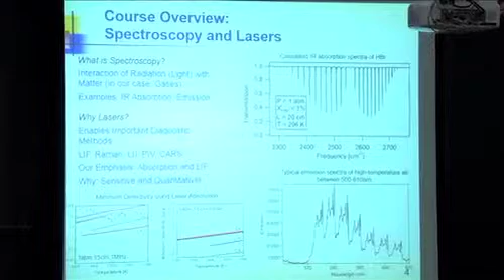If you look to the right here, there's a plot of the fractional transmission, one is at the top, versus frequency and wave numbers - that's 1 over wavelength. This is in the infrared at about 4 microns. It's hydrogen bromide, and what you'll see is there's a pattern of lines. We call these lines - a line is the wavelength or the frequency at which you see a specific molecular transition. So what you'll notice is that that molecule has a very regular pattern.

And every molecule is different - that's the power of spectroscopy. But there's some regularity here that is related to the structure of the molecule that we can take advantage of. So you can use spectroscopy to characterize a molecule and its bond lengths and its angles, or you can use that information to calculate the spectrum. So it goes both ways.

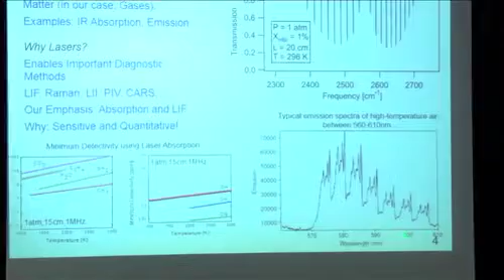Now the simplest form of spectroscopy for high temperature gases would be emission. You might look at this - this is from one of my laboratory experiments for my lab class. It's the emission that you see in electrically excited air in a specific wavelength range between about 500 and something up to about 600 nanometers. So if you looked in that region of this low pressure discharge in air, you would see this pattern.

So you'd say, well, that's pretty complicated. But if you look closely, the pattern is repeated - it's repeated, so there's something about the spectroscopy that's repeated here. And furthermore, there's some structure within here that we'd be able to see if we had high spectral resolution, which we don't have in most cases, but we do with lasers. I'm going to skip over this plot right here.

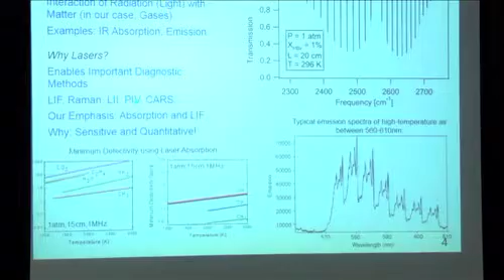So the reason we use lasers is that they give us intense power, collimated beams. Often they're monochromatic, so that we can do almost perfect spectroscopy experiments where we can take advantage of the shapes and character and positions of lines. So lasers allow us to do laser-induced fluorescence, Raman spectroscopy, laser-induced incandescence. We might use lasers also for doing particle imaging, velocimetry - a lot of different methods that are enabled by the high spectral intensities of lasers and their collimated nature.

So we like these techniques because they can be very sensitive and they can also be very quantitative, and I'm going to focus a lot on quantitative. I'm going to just give you some examples, and these are now drawn from energy sciences.

The next page will be propulsion. There's a lot of example applications you might be interested in: remote sensing of pollutants, combustion efficiency, process control, and other things. The parameters we usually care about are species concentrations, temperature, pressure, density, velocity, mass flux, thrust, and so on. We get at these by studying spectroscopy.

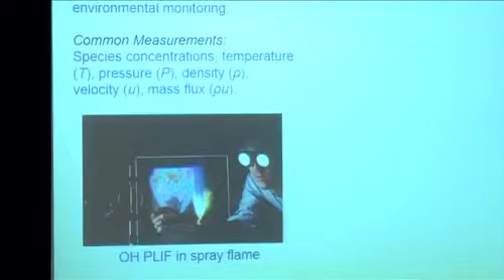I'm going to show you a few examples. This was the first OH PLIF image in a spray flame, from 1986. That student is now vice president of a company in Boston. PLIF stands for planar laser-induced fluorescence, which was something we developed at Stanford around 1982 or so.

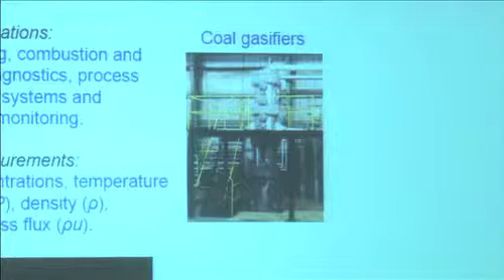That was a simple laboratory flame, but we can also study something big, like this coal gasifier, which is complicated by the fact that pressures are high, 15, 20, 30 atmospheres, high temperatures, particle laden, a very challenging environment.

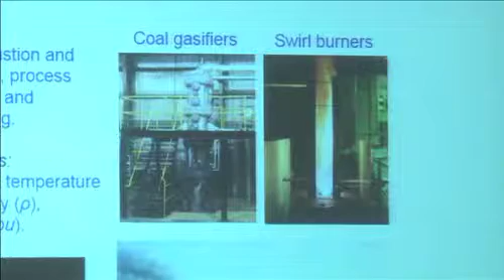Swirl burners, we did that on a visiting trip to University of Cincinnati with Professor Gutmark. This was a gas turbine combustor study. We've also been to coal-fired power plants. So these devices are useful in the laboratory at small scale, and they're useful in the field, and we occasionally have a capstone project for students to take their measurements to the field.

And here's some incinerators - John Farrell's not here, but these were from Exxon, a project we did for them on incinerators at a petroleum plant. So you get a sense of the scale of things. These are what I call energy sciences.

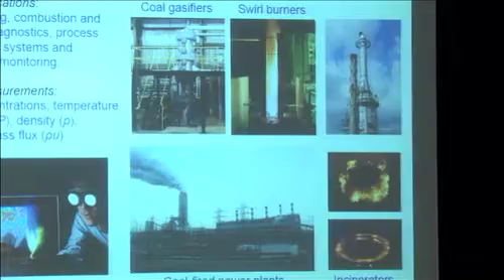Now let's look at propulsion ground test. I like to think that optical diagnostics have overlapping value from three different domains. Sometimes we study things where you're doing a very sophisticated ground test facility.

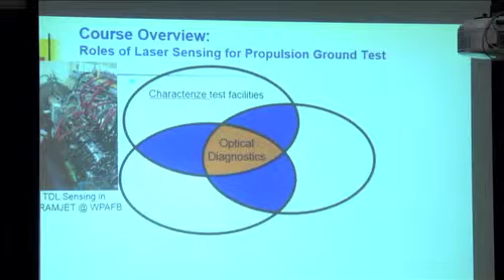This is a scramjet test facility at Wright-Patterson Air Force Base - very big, expensive to run. They roughly know how it works, but they need to characterize the facility, and we make use of laser diagnostics.

Sometimes you're studying something that is so difficult we don't even understand it yet, and lasers are used to try to understand a complex environment. This is a 5-tube pulse detonation engine that we studied out in the desert at China Lake some years back.

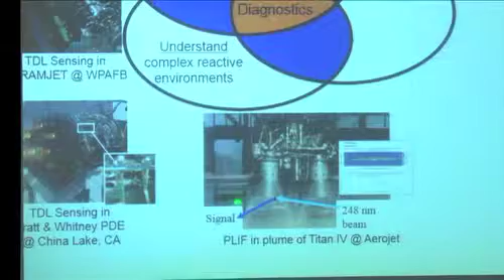One of my students did this in the exit plane of a Titan IV. These are flow fields which we don't even understand yet, so you're trying to use in situ imaging or measurements to characterize these difficult flow fields.

Other times, the facilities or flow fields are well understood, and what you're trying to do is generate high quality data that can be used to validate models, as with this simple scramjet - an injected flow of hydrogen in a high speed cross flow of air, and that's an image of temperature. Or we might be looking at an IC engine.

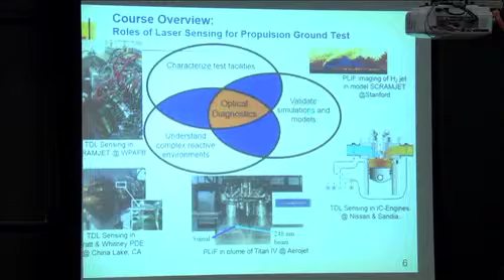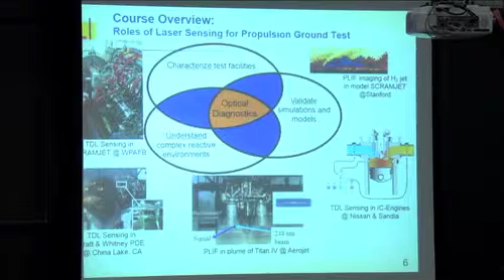So lasers are used both for high quality validation of CFD tools, to try to understand very difficult environments where in situ probes aren't useful, or to characterize facilities. For example, we've been to one hypersonic shock tunnel that only runs for a millisecond or so - can we characterize what happens in a short time in a high enthalpy facility?

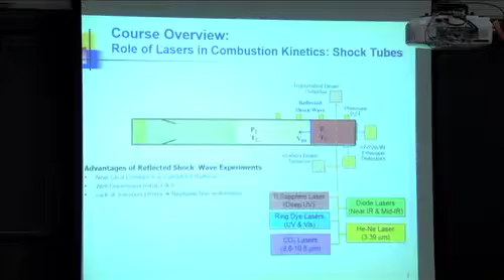So these ideas are applicable to large-scale systems and also to laboratory science. One of my favorite tools is the shock tube - a long tube, 100 diameters long. You break a diaphragm, send a shock wave down, it reflects and leaves behind a static sample of high temperature gas. You can pick any temperature you want.

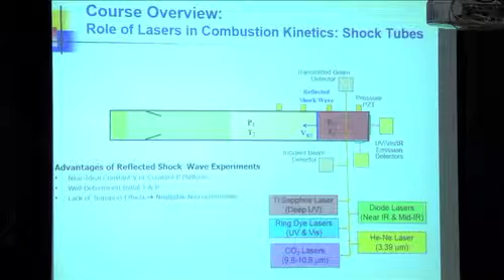We work down to 600 degrees, up to 11,000 degrees - a static sample which we probe with various wavelengths of light to measure what's happening inside as a function of time. We use this for chemistry because it's a nearly ideal environment: short duration experiments, sub-millisecond to tens of milliseconds, no heat transfer effects, no wall effects. It's a very clean single pulse experiment, with good clear optical access for quantitative measurements.

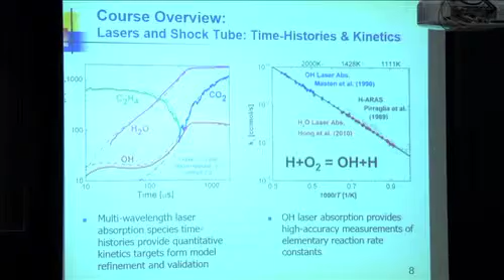Other times we're trying to characterize a very complicated chemical kinetic mechanism, and we might measure species versus time following shock heating. We might measure several species, which has the effect of constraining detailed mechanisms that might be comprised of 1,000 reactions. How do you adjust the knobs of something with 1,000 rate coefficients? Very hard to do. So you need higher quality data than have been available before, and we do this in the form of multi-species time histories.

Now, this would be what I call a potential energy well for a diatomic molecule. This is a distribution of potential energy that's associated with the charges. A diatomic molecule has positive and negative charges - they repel. So this molecule will vibrate with a variable internuclear spacing - that's this coordinate - and that's the potential energy associated with the charges.

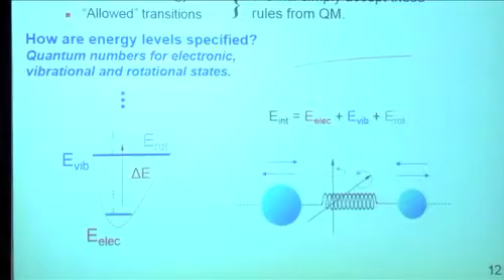In addition to that, the molecule has internal energy associated with vibration and rotation, and those levels are shown here. So this is our simple picture of a diatomic molecule - it's 2 masses separated by a massless spring. The variation in distance with time oscillates, and it's also rotating. We're going to find that if we just think of this as a classical spring-mass rotating system, with just 1 or 2 results from quantum mechanics, we get everything we need.

That's kind of amazing. All right, so quantum mechanics - the energy states are quantized, and we'll learn more about that later. What that means is that you have discrete spectra. So if we have a molecule in this state, and typically energy is written as a horizontal line, energy is upward, if we have a molecule or atom in this state, it may undergo absorption and go to another state, or it may undergo emission and go to another state. If you can have one, you can have the other. But those are so-called allowed transitions. It may be that this is not allowed to go directly to here - quantum mechanics would forbid that. So discrete energy states means discrete spectra.

Now, Planck's law, and when I can remember, I put a red box around things that are really important. This is just conservation of energy: Delta E is E upper minus E lower. Not so hard. But now that's equal to h nu - whenever it's a frequency, that's Planck's constant h. So this is the equation that you would have heard from physics, the duality of radiation in terms of photons and waves. This is saying that delta E is related to this frequency, but you can also think of it as the energy of the photon.

So this is the very famous Planck's law, delta E equals h nu. But you know that C is lambda nu, so I can substitute until delta E can be written as hc nu bar. When I can, I write nu bar for a special kind of frequency. It's 1 over wavelength. It's a measure of energy.

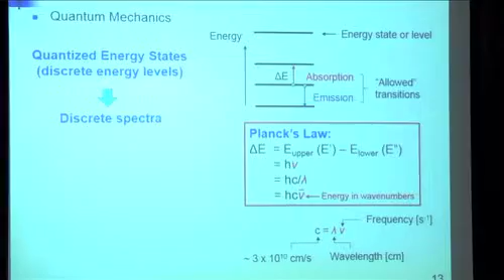So Planck's law we use to relate these energy levels to the wavelengths for which we're going to see absorption or emission. If you're dealing with small molecules, and oftentimes in combustion we're dealing with small molecules except for the fuels, small molecules have a discrete structure that tends to be isolated. We can see the different features.

If you have large molecules, for example a fuel molecule like heptane, then you begin to see that the absorption and emission spectra look like they're all blended together. We can't separate them, because there are so many energy levels they begin to overlap. So it's typically discrete or blended depending upon the size of the molecule.

You have to be very comfortable with this. Everybody should be comfortable with it: C equals lambda nu. So you can always go back and forth from lambda to nu.

The two main ideas that we like to use are emission and absorption. There are other types of spectroscopy, Rayleigh scattering, Raman scattering. We'll talk about those briefly.

In absorption, you send in a bright light with intensity I0, and the units might be watts, or watts per square centimeter, or watts per square centimeter per unit frequency, and out comes a little bit less. How much less depends upon the path length and the composition. If you scan this laser in frequency or wavelength, you would see isolated features if you're in a region where absorption takes place. Those are the individual lines, which is another word for transitions that we can see.

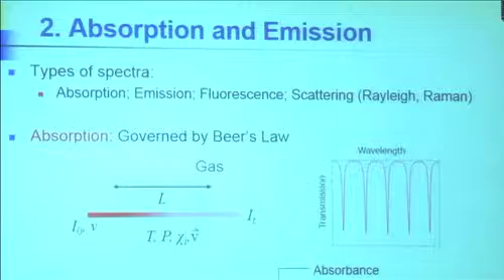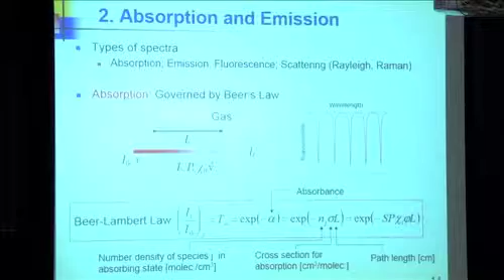That's going to be governed by what's called the Beer-Lambert law, which we're going to derive around lecture 5 or 6. It says that the ratio I to I0, called the transmission, is given by an exponential decay law, which may be written in different ways, but this term is called the absorbance. You can think of it in terms of a cross-section, a path length, and a number density. So that exponential decay contains the information we might want. If we know L, and if we know the cross-section, we can solve for N, and so on. That's a key relationship, that's why I put it in the red box.

I want to communicate the idea that spectroscopy has really three components: lines, bands, and systems. We have to be comfortable with those ideas.

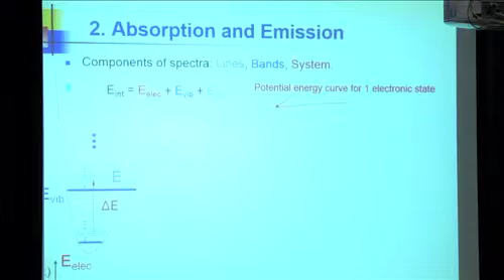Now we're back to this. When you see this diagram, it's typically for a diatomic molecule. This is the distance between the nuclei, and this is the energy stored. It's called E-electronic here, but it's the potential energy associated with the charges.

Superposed here are horizontal lines that correspond to vibrational levels, which are quantized, and some fine-scale rotational energies, which are also quantized. The simplest way to think about the energy of the molecule, not the kinetic energy but the internal energy, is that it's the sum of the electronic energy, vibrational energy, and rotational energy. We imagine that they're independent, and that gives us some advantage, so we think it's simply the sum of all three contributions.

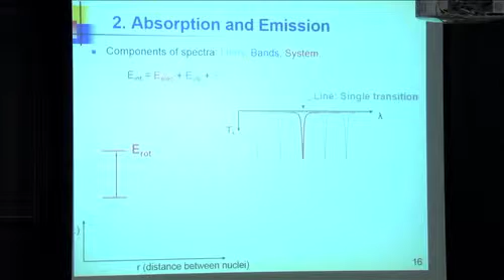If we look at an individual transition from one state to another, that's a line. The reason it's called a line, you'll see in some exposures on film - the way those experiments were conducted for 50, 100 years, the horizontal axis was wavelength and the vertical axis was nothing, just another way to gather more light. So it appeared on film as if they were lines, but they were really just single wavelengths for which light was being emitted or absorbed. That's a line, a single transition.

On the other hand, if you looked at the multiplicity of lines that might go along with a vibrational transition between V lower and V upper, and scan across some spectral region, you would see a family of lines - in fact, you might see this pattern I showed you earlier. Those groupings of lines, that group of lines, is called a band, and that band is comprised of two branches called R and P. So these individual elements are lines, this group of lines is called a branch, and the two branches together is called a band.

A band means the specific upper and lower vibrational states. So these would be the delta V, V upper minus V lower, of 1. These are the allowed so-called ro-vibrational transitions, ro for rotation, V for vibrational.

So ro-vibrational means combined rotational and vibrational quantum number changes, because they go together. This is for delta V of 1, which is the strongest case, but it's also possible for delta V of 2 or 3 to occur. They're usually quite a bit weaker.

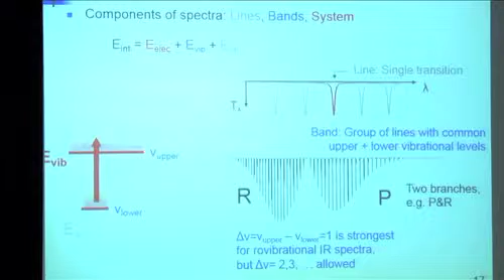So if I showed you an expanded region of spectral space, here's the delta V of 1 transitions, here's the delta V of 2s, and here's the delta V of 3s. Each time you go from here to here, the intensities go down by about a factor of 100. So these are the strongest ones.

This is for CO. So these are called the fundamental, first overtone, second overtone. Each one of these groupings is a band. So bands have lines. Bands have two branches.

Now we have to recognize that you can also have transitions that go between different electronic states. So in nitrogen, molecular nitrogen, there will be different electronic states, and they're called A, B, and C, for example. Not shown is the one called X.

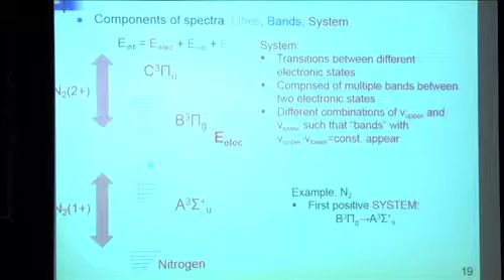If you have transitions between these different manifolds of states, all of the lines between these two manifolds is called the system. So the system is like the big picture of all the lines that go from B to A. A different system exists between B and C. The system would be comprised of many bands, and the bands would be comprised of 2 or 3 branches, and the branches are comprised of lines.

Spectroscopy is accounting, just accounting.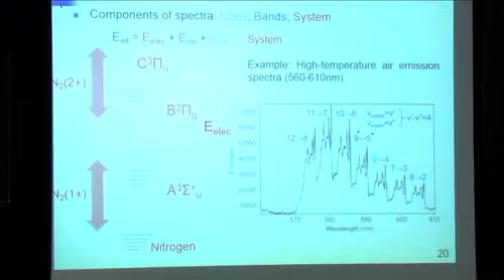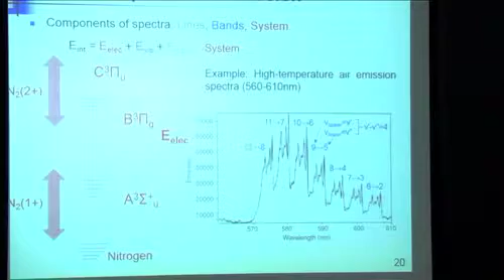So 6 to 2, 7 to 3, 8 to 4. You'll notice that all the numbers differ by 4. So this is the group of the delta V of 4 bands. It's also possible to have delta V of 3, 2, or 1, but these are the primary delta V of 4.

So now you're realizing that when you go to systems, there can be a lot of lines. If you have just a band, it's not so. We could blow this up and figure it all out if we had enough spectral resolution. There's a lot of rules being followed here, and a lot of notation. But in the end, it's really just lines in bands or in systems, and you have to decide what you want to study.

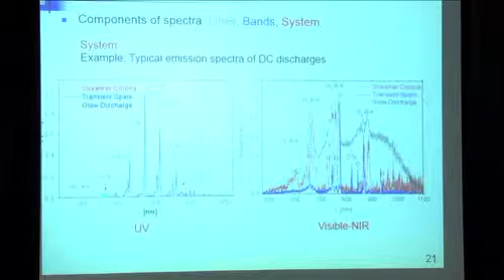If we looked at a few different electric discharges in air, maybe wet air, you begin to see a lot of different features in the region between 250 nanometers and, well, your eyes see between around 400 nanometers and say 750. That's where your visible is. To the left of that would be the UV, and to the right is the near infrared. This is another case of a different kind of plasma.

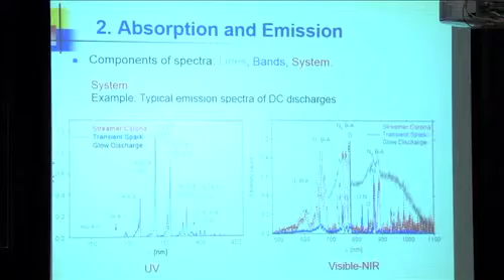The thing about a plasma is you can have a cheap, low pressure discharge and get a lot of light out. So you use emission when something is hot. You tend to use absorption when things are cold. The emission comes from excited states, so all you can learn is something about the excited states. In absorption, you learn something about the lower states. But there's patterns, and with time, you can figure out these patterns—which systems are involved, which vibrational bands, and so on.

So we look at a single line, and now we start adding them up, and there's a lot of lines here. You might think that they all overlap, but they don't. This is where the word line comes from, I think.

So in the old days, people would use film—maybe they still use film. People would use film and put it at the exit of a machine called a spectrometer. Actually, they called it a spectrograph. Spectrograph implies that you're going to measure at multiple wavelengths simultaneously and record on something like film, or maybe nowadays a CCD array.

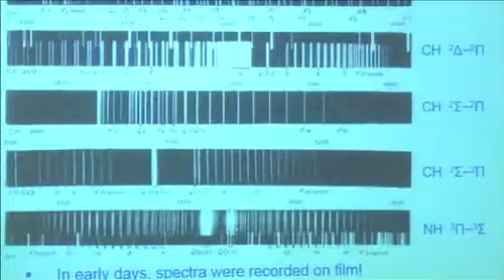So you take light, send it into the box. The box disperses the light so that light at any one wavelength goes to a specific location. So this, from left to right, is just a distribution of intensity versus wavelength. And at any one wavelength, there's a line that appears corresponding to a specific transition.

Over time, the spectroscopist would learn, well, this is the spectrum of OH for a particular system. That's the 2 sigma to 2 pi system. You'll learn about that later. For the 0-0 band, they can figure out what that is. Once it's known, it's known forever. OH doesn't change. CH, NH, and so on. Each of these molecules has its own spectrum.

You can change the spectrum if you change the temperature, because you populate different states, and therefore different states emit. So by changing the temperature of the emitters or the absorbers, you can probe different parts of the spectrum and learn more about the molecules.

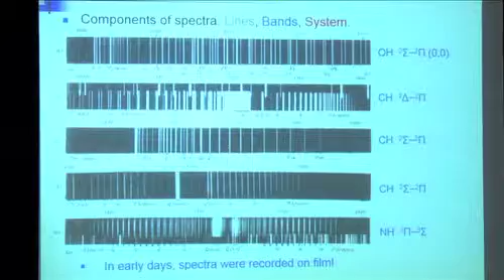So you can use this to study molecules. What's the bending angle of H2O? You can figure that out. What's the internuclear spacing? You can figure that out. So you can figure out a lot from spectroscopy, or use that information to calculate the spectroscopy.

So it used to be that people would use film. Now they'd probably use CCD arrays. Now we use lasers. And I'm going to talk about absorption and emission.

Absorption is a favorite of mine. We send in some light from a wavelength-tunable laser, through some sort of medium—might be a flame—onto a detector. The detector just sees photons. How many are coming in?

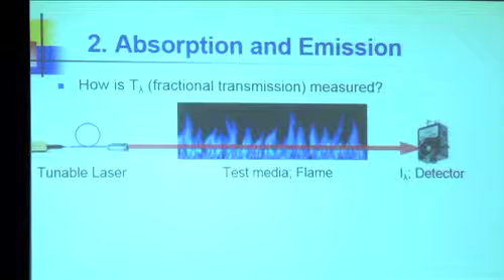Now, since I told you the energy states are quantized, the difference between two numbers is a number, and that line should have only a single wavelength. But then quantum mechanics tells us one more thing: there's something called the uncertainty principle, which says that when you have microscale systems, if you watch it for only a limited amount of time, there's a limitation on how well you can specify the energy. That's the Heisenberg uncertainty principle.

So it turns out that for these reasons, lines are not infinitely narrow. They're not a Dirac delta. They actually have some width. And that's very interesting because this width depends upon environmental factors.

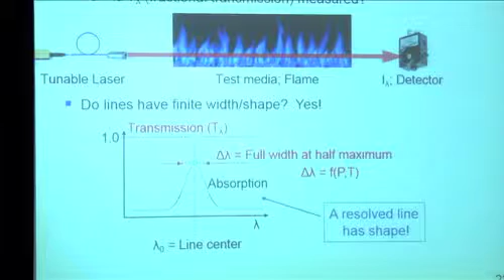So if you were to study the shape of an absorption line—here's the transmission, which I can invert by Beer's law to plot as absorbance—it has some width. Even if I measure this with a monochromatic laser, it'll have width, and that width is a function of pressure and temperature. So all of a sudden, with the laser, we have the ability to use line shapes to measure pressure and temperature. That wasn't possible before we had monochromatic sources.

Just to reiterate, there are three key elements of spectroscopy: positions of lines, strengths of lines, shapes of lines. Positions of lines can be determined once we have formulas for the allowed energy levels, and the rules from quantum mechanics that tell you which ones can talk to each other. You've just calculated the positions of all the lines that are possible.

But you don't know how strong they are. The strength of the lines is something else—that's a different part of science. So we have to find out where the lines are, how strong they are, and then how they're shaped. Those are the three key elements we need to understand to do quantitative spectroscopy.

Now we have to deal with something called the Boltzmann distribution. So now I ask: how many people here have not had statistical mechanics? Everybody's had statistical mechanics. Everybody knows S equals K log omega. Everybody's heard this. Okay, so this is really an important thing.

Statistical mechanics is so important to us because it tells us the fractional population in a given state. If we have a state N1 of a specific molecule or species, we can calculate the fractional population of that species in this state using this simple relationship: G times e to the minus energy over kT.

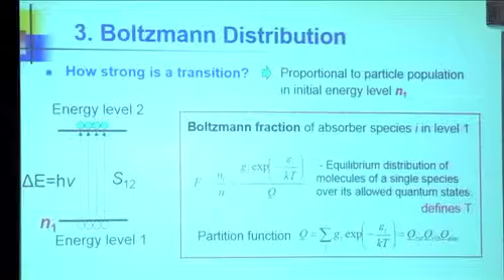You can have a rotational temperature that's different than a vibrational temperature. You can have situations that have no temperature. If you have a laser with a population inversion, what's the temperature? Negative. Pretty amazing. So you have to be careful what temperature means. It's your friend, but it can be tricky.

But if we have a well-defined temperature, this is how we get the population in that state. Why do we care? Because the simplest concept for absorption and emission is that the signal is going to be proportional to the number in that state. So we need to be able to count the number in that state in order to estimate the strength.

Okay, that's 29 minutes. That's enough theory for today. What I want to do now is give you a bunch of examples, and the idea is just to show you how powerful these ideas are and how far you can go.

All my students are mechanical engineers. They start coming in, they've never had a course in spectroscopy. I've never had a course in spectroscopy. So you learn, but you can learn this stuff.

I've had a vision for quite a long time of using tunable diode laser absorption in aero propulsion. Here's a scramjet cartoon. The idea is that you would have a family of different lasers, little semiconductor lasers, very very small, each one with a different color or wavelength. Each one maybe can be tuned over some narrow wavelength.

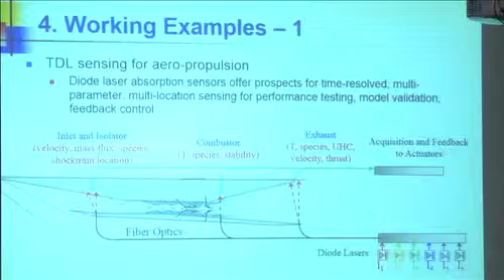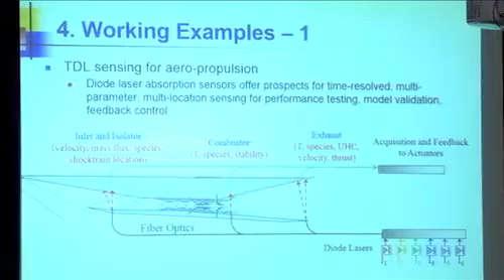You propagate those things through fiber optics and probe different places in your combustor. This is a scramjet combustor, but it could be some other kind of combustor, like an internal combustion engine. Each one of these colors is designed to tell you something different - maybe it's a different species, maybe it's to give you temperature or velocity.

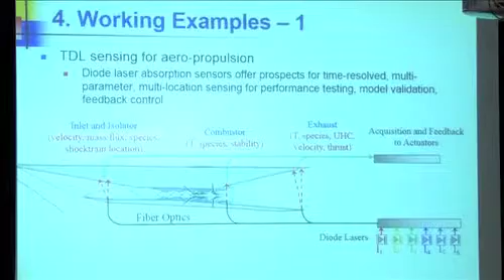Or you could do something up here at the inlet - you can measure the mass flux. We've done this in the inlet of aircraft, on the ground. And the Air Force is trying to do something like this now with some of their scramjet tests. So this is the idea.

You would take this same physics, but you have to know the spectroscopy well enough to pick these colors and design your experiment. But you can measure a lot of different quantities in this experiment. Over time, we've worked on techniques for temperature, velocity, water, CO2, O2, and others.

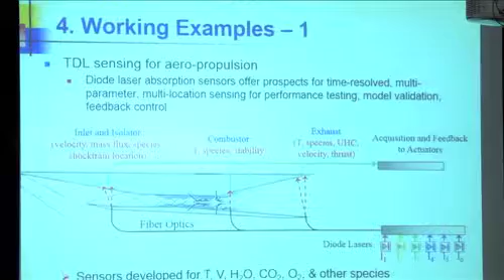Generally, we develop the ideas in some simple laboratory system, and then we might take them on the road. We've been to ATK on Long Island, University of Virginia, Wright-Patterson Air Force Base, China Lake, a lot of different places. And as I said, the Air Force is now starting to use these ideas in some flight tests.

And I think eventually these ideas could be used for control. Right now it's more like what can we measure, what's happening inside, fundamental experiments, but eventually I think we could use these for control.

Here's another example. That was kind of a scramjet example. This is now a high temperature example. We live nearby NASA Ames Research Center, about 10 miles away. One of the things they're famous for is they have some high-powered arc jets.

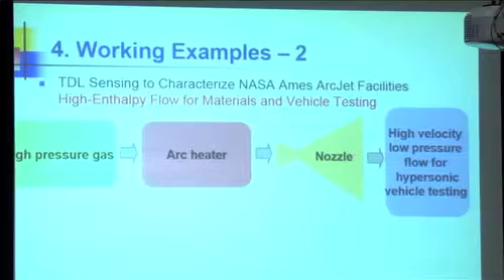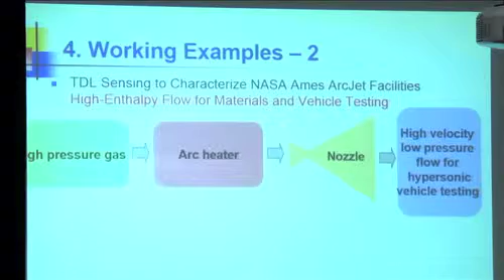They have, I think, a 20 megawatt and a 60 megawatt arc jet. They heat air at high pressure, expand it in a nozzle, and flow it at high velocities over, say, some tiles that they're testing for the space shuttle. It's a way to produce very high enthalpy gas, usually air, or at least some oxygen. You add energy in the form of this constricted arc, and expand it in a converging diverging nozzle, producing the high velocity, low pressure flow that you might associate with hypersonics.

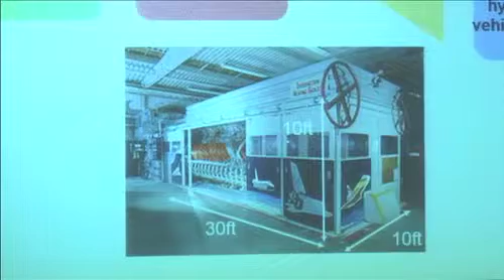It's a difficult experiment because of all the electromagnetic radiation and noise. They put all this in a big box. All those orange lines are water cooling lines. It's up to 60 megawatts, so a lot of water cooling is required to keep this thing alive. It runs for minutes.

This is the design. You have some sort of an anode and then a stack of copper discs comprising this constrictor tube that might be several feet long. The arc strikes and goes from this to the cathode. The idea is that you constrict it so that hopefully over that length you heat the gas to some controlled high temperature. Then somewhere in here you may add more gases, and we'd like to measure right here to get the stagnation conditions before they expand.

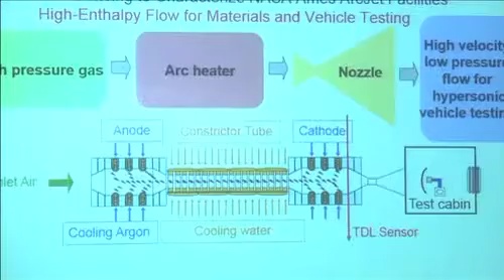So how would you calculate the flow field? You might do some sort of energy balance — how many megawatts are in, how much cooling water's out, and so on, what the flow rate of gases is. But you'd really like to measure it right there. We've been working on this for a while, successfully, and then back again.

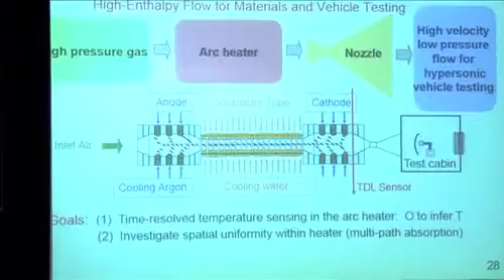The temperatures are going to be in the range of 6,000 Kelvin, air at maybe 6 atmospheres. At 6,000 Kelvin and 6 atmospheres, you can argue that air will be in chemical equilibrium, because the time scales for reactions are much shorter than the flow time in this channel. One of the things you have going for you is you know you're putting in air, or maybe air and some known amount of argon.

You can assume chemical equilibrium, and that there's one temperature for all the states you're worried about. We're going to take advantage of that. One of the questions we're going to have is whether this flow is uniform or not. So this is a difficult situation — high temperatures, high pressures, high currents, and so on. Lots of mechanical, optical, and electrical difficulties.

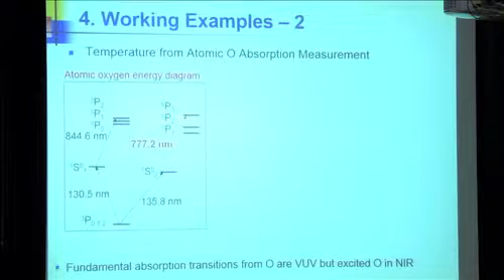Now here's the physics. The optical access is a problem because it's just like a web of water cooling lines. How do you get light into this duct that's some 5, 6, 7 centimeters across? Optical fibers — you come in with optical fibers and some special lenses on the end, and beam it across and pick up the light. That's what we do.

This is the energy level diagram for atomic oxygen. It's a little different than the molecular ones I was showing you. This would be the lowest energy state for atomic oxygen, and here are the next excited ones. At some point we're going to talk about this notation, called term symbols. These wavelengths are so short you can't really propagate that light — even with a laser, you can't propagate it through air because it's absorbed. That's the so-called vacuum ultraviolet region.

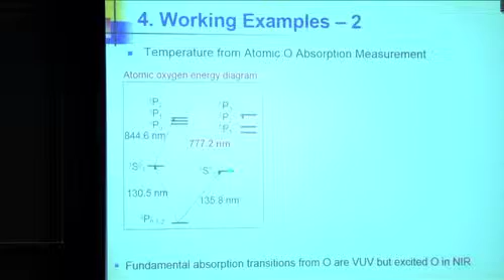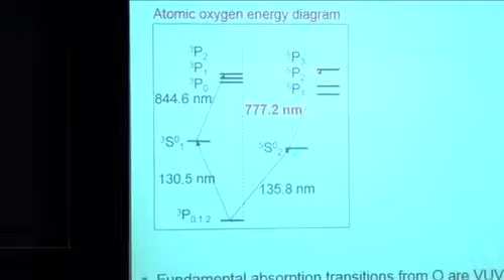But we can excite and detect here. If we use a wavelength of 777, that promotes the absorption from here to here. Using Boltzmann's relation, I can relate this population to the total oxygen population, and argue that the air is in equilibrium. So if I measure, I know the mole fraction of total oxygen present — and in most cases the oxygen will be fully dissociated. But in any case, if I measure the density in this one level, I can actually tell you the temperature, because of the chemical equilibrium argument.

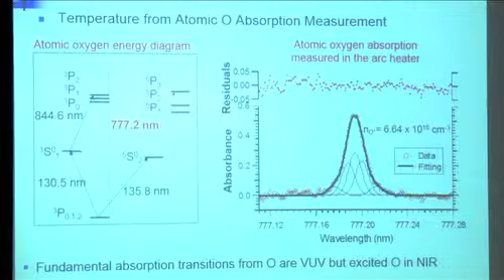The integrated area under that feature is proportional to the number density of this state—proportional to the path length, number density, and cross-section. So by integrating over this and knowing the length, we can convert this immediately to the number of atoms per cubic centimeter in that state.

That's enough, together with our knowledge that we started with air, to calculate the temperature rather well. That's the idea, though I'll put aside some of these difficulties. This measurement is very temperature sensitive.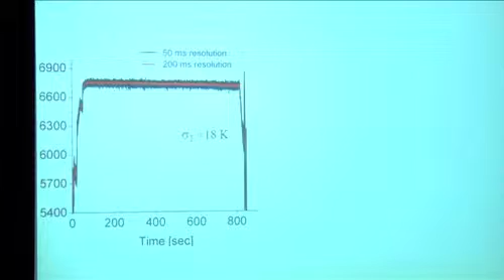This is the power of using photons. At this point, somewhere in the last 200 seconds, they changed the arc current—decreased it by about 100 amps out of 2000—and we could actually detect and see it. So this was working amazingly well.

Now what is this? This is a path-average temperature. We only have two numbers—I over I0—and we scan it, so we really get the path integral of the number density in that state. Only on the assumption of uniformity can we infer this temperature. Or if you tell me the distribution shape, I can tell you the peak temperature.

What I'm not going to show you is that we've measured at different locations, different transverse directions, to sort out this non-uniformity problem. It's not quite symmetric, we've discovered, which is an important finding. If it's not symmetric, then when it goes through the nozzle and over the test article, you may get non-uniform flow, and that's what they're worried about.

Okay, I'm going to go to another example. Looks like I'm maybe going too fast today.

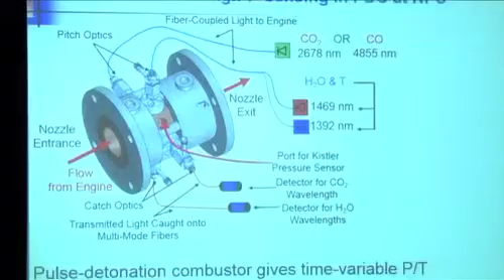For those of you interested in engines, this is a detonation—a pulse detonation combustor, essentially a pulse detonation engine. To the left is some sort of system, a pipe or tube, in which detonations are induced from time to time, maybe 20 hertz.

So there's a pulsed flow coming from the left driven by detonations. You fill the tube with the detonable mixture, set it off, the detonation wave comes down, the gas flows out through the nozzle, and some people have argued you could connect that exhaust to a gas turbine. So instead of steady flow coming in, you'd have pulses of flow.

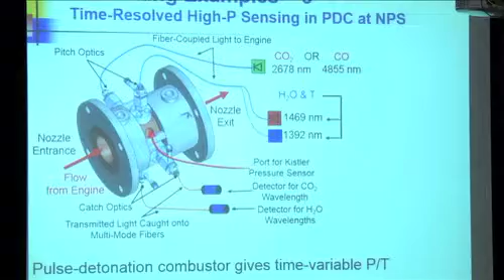That's going to be a problem in terms of survivability of the turbine, but why would you care? This detonation combustor, maybe a meter long, has a detonation wave that moves so fast it burns almost like constant volume. You can show from thermodynamics that constant volume combustion can be more efficient than the constant pressure combustion normally used in a gas turbine. So there's thermodynamic potential if you can learn to live with the downside of detonations.

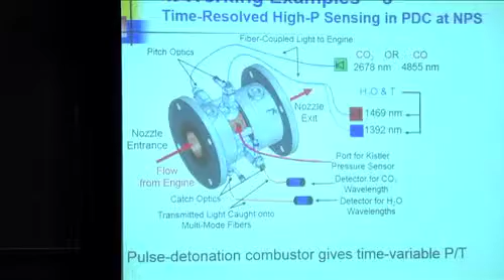So they'd really like to know what's coming out as a function of time, and what's going into this downstream unit, which would be some sort of turbine. Basically you have to imagine oscillating conditions, and you want to know how efficient it is, how much energy flux. So we have a gas dynamics argument here.

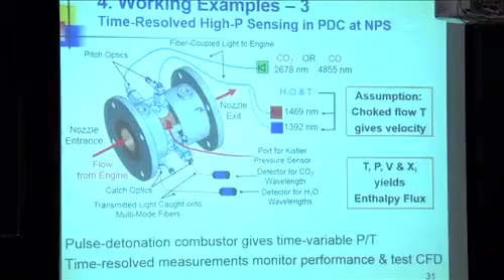So inside this test section is a throat, and to the left it's essentially always choked. What do we know? We have choked flow, sonic flow, and we take advantage of that knowledge together with some measurements at different wavelengths and colors to try to say what's coming out as a function of time. What is the velocity? It's sonic.

So if we measure the temperature, we know the speed. We measure the composition, we measure the temperature. The idea is that if we measure here at the throat, we can sort out enthalpy and everything, assuming uniform conditions. That's the idea—so we might work with CO2 at 2.7 microns.

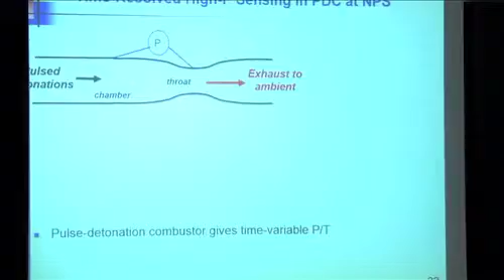That's in the infrared. CO is in the infrared too—we do a lot of work in the infrared, these are low vibrational transitions. This is the conceptual setup: here's some sort of detonation tube, and to the left would be some sort of igniter.

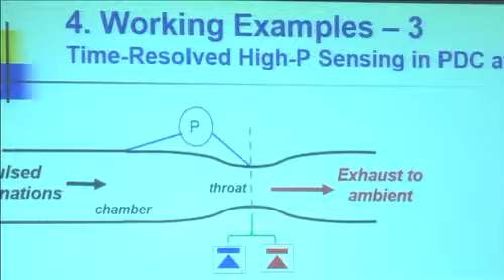So the air is flowing and the fuel comes on, it ignites the detonation wave, and then the fuel comes on again, maybe at 20 hertz. The higher the repetition rate, the higher the power coming out. We'd like to measure what's happening out here, but we'll do it by measuring in this throat. That's the idea, something we've done in the last year or so.

One student was measuring temperature in water, mole fraction, by looking at the ratio of absorption in two lines. If he takes the ratio of absorption in two lines, he's measured the relative populations in two states, and therefore with the Boltzmann relation, he's measured temperature. So he measures temperature in water, and the other student was measuring concentrations of CO and CO2. I think the fuel was usually ethylene.

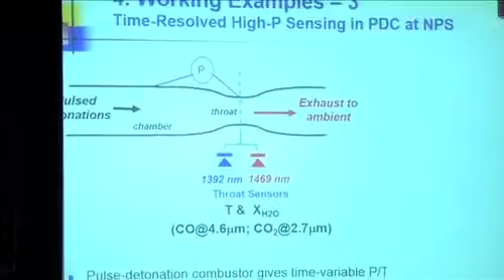The main thing is this is a variable pressure, temperature, velocity, time problem. You have to have very fast diagnostics. The key was this idea that if we had choked flow, sonic there, we could sort everything out. That's why we have the red box here again. Time-resolved measurements, the idea would be to challenge the CFD. There's actually not a CFD code for this - it's a little too complicated, but they're trying to develop one.

This would be a measurement for a single cycle. The blue is the temperature model, and the red is the temperature measurement. So note the time scale - everything is kind of over in 1 millisecond.

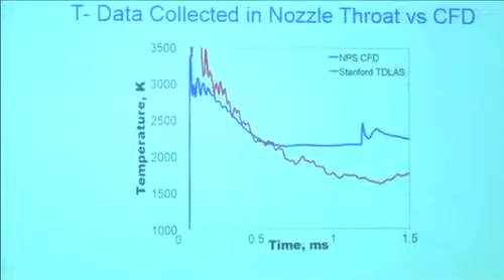Those of you who saw Thierry Poinsot's talk today saw that nice detonation experiment with the stuff sloshing around. That's basically what happens over milliseconds. The gas just blows down and then kind of sloshes around a little bit there. But notice we're measuring temperatures up here at 3,500 degrees Kelvin. There are some big differences between the measurements and the code. They're still working on the code because it's a challenging problem.

So it was a challenge to get a sensor to work at these extreme conditions. You have to understand spectroscopy in order to design the system that works. This was only like maybe a 1.5 centimeter gap - a pretty narrow path to work with. But anyway, we figured out ways to work at high pressures and high temperatures, and at least at the early part, it worked pretty well, really.

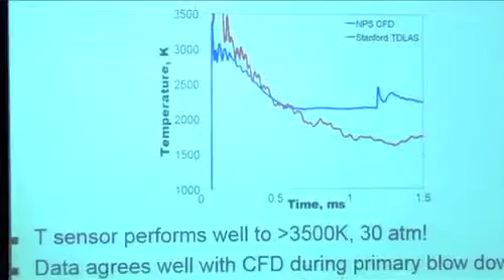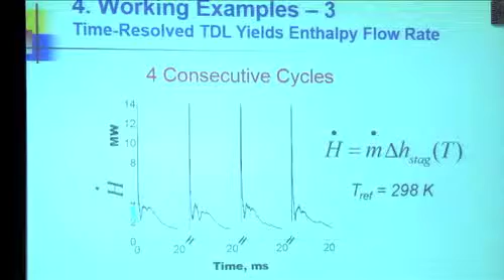From these components, we can get the enthalpy flow rate, which is in fact what we got the money for. Could we develop an enthalpy flux probe? That was the idea, so we figured out how to do that. This is a plot of enthalpy flux, peaking out here about 14 megawatts.

So the idea is, could you measure this? The first thing we see is that it's pretty much the same from cycle to cycle, so that's good reproducibility. Then, of course, you'd look at some sort of integral under this curve to try to get the total per cycle. I don't think anybody's ever done this before - the idea of measuring highly transient power, mass flow, power flow, integrated information.

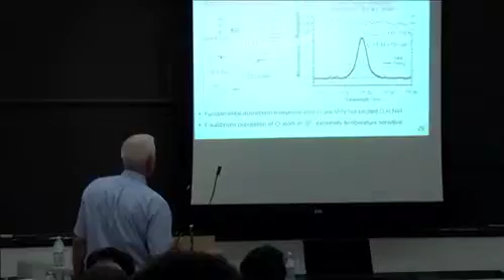The transition is at 777.2, but the peak isn't. Well, you have to recognize that this line is actually the superposition of some fine-scale structure, and you have to understand that and the relative strengths. Although it's symmetric, so I'm still not sure I understand your question.

Well, I think it should be - on the left, it shows the transition is 777.2. Uh-huh. And on the right, it doesn't look like the center of the peak is at 777. That's close enough for university work.

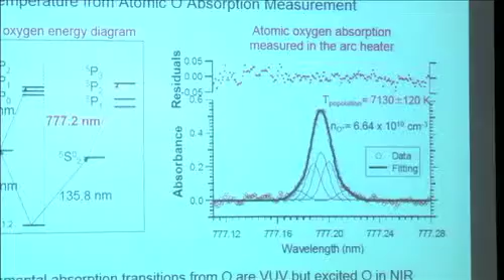I hope all the questions are that easy. No, that's just rounding it off. If the students come back and tell me way too many significant figures, I always pound back on them - if you don't have any evidence to support 6 significant figures, then don't give them to me. So this is probably a case where I just told him to keep it simple, 777.2.

But we have to be very careful about the actual spacings of these subfeatures. Sometimes you have to worry about subtle things like isotopes - they have slightly different spectroscopy. So there's some hidden subtleties here that I'm not going to get into today, but this single feature is really the superposition of some fine structure.

Yes? For this one, you assume the total number of moles of oxygen, right? To find the temperature? Well, you put in air - let's just take the simple case. Temperature is high enough, all of the O2 becomes O. And now you know from chemical equilibrium arguments that if I give you the temperature and the pressure and the relative numbers of nitrogen and oxygen atoms, you can tell me the composition.

So let's just say it's at 6 atmospheres. Turn the problem around - it's at 6 atmospheres, and I've told you how many O atoms there are, you can tell me the temperature. So it's just an equilibrium argument that we use.

Yes? What determines how many branches do we have in the band? Ah, good question. So in the simplest case, it's 2 - I don't know if I go that far in this lecture. You'll notice that they're called P and R. It follows the alphabet - there will be an alphabet soup that goes O, P, Q, R, S.